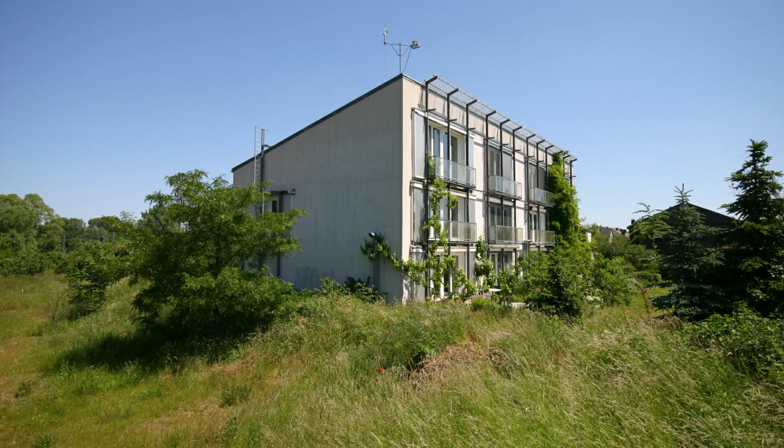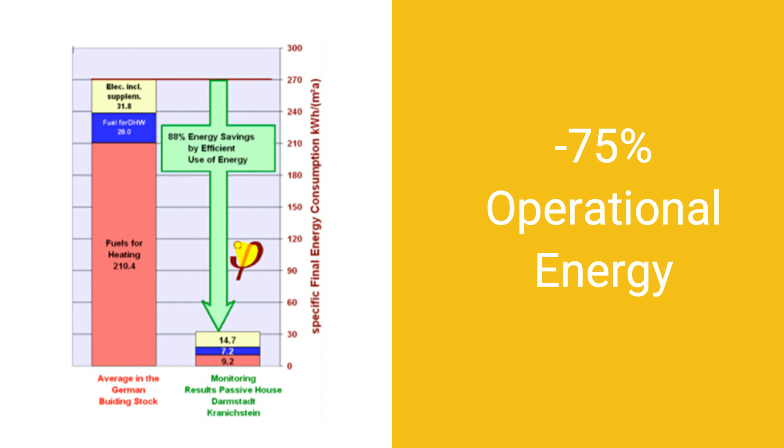The Passive House standard was created in the early 90s based on scientific research that concluded comfort drives performance. In the process of dramatically improving comfort, application of the Passive House principles also resulted in up to 90% reduction in the energy required for heating and cooling, and up to 75% reduction in the total operational energy use of buildings.

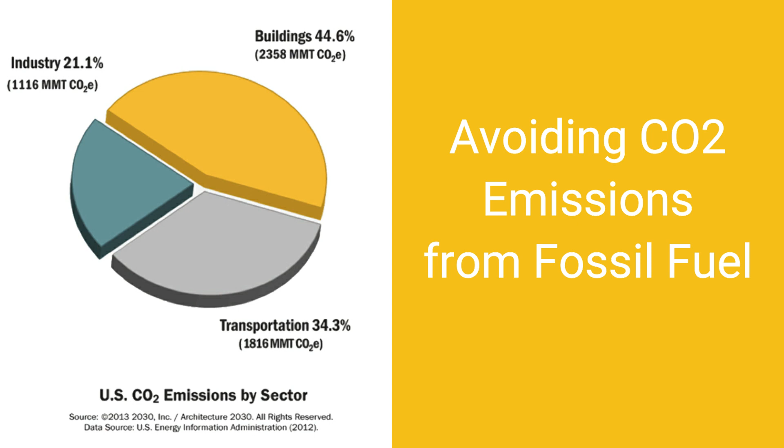Historically, almost all of that energy was derived from the burning of fossil fuels and has been a major contributor to CO2 emissions. In an effort to drive down those emissions, an increasing number of countries, regions, and cities are adopting the Passive House construction standard in order to support their transition to a fossil fuel-free energy grid and reach carbon neutrality. Those places include the province of Brussels, British Columbia in Canada, the entire country of Luxembourg, the cities of New York, Dublin, and many others.

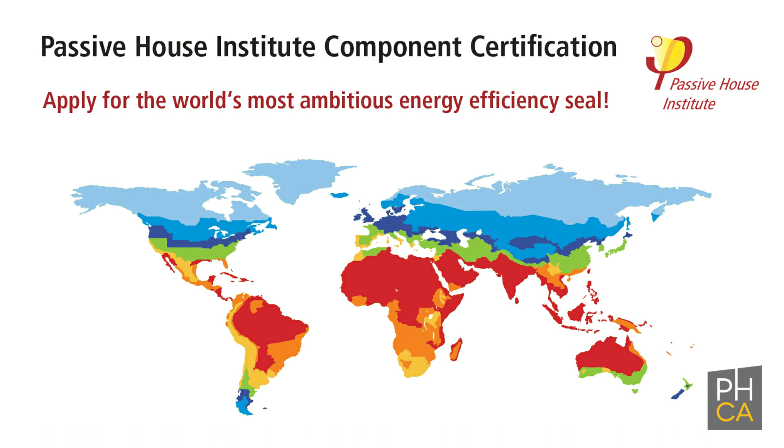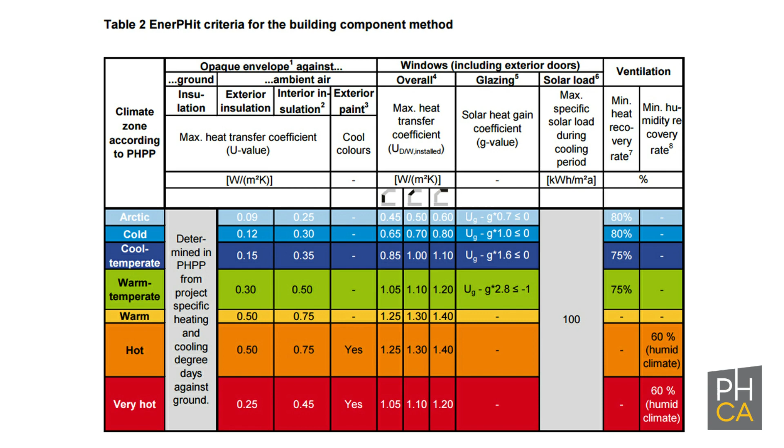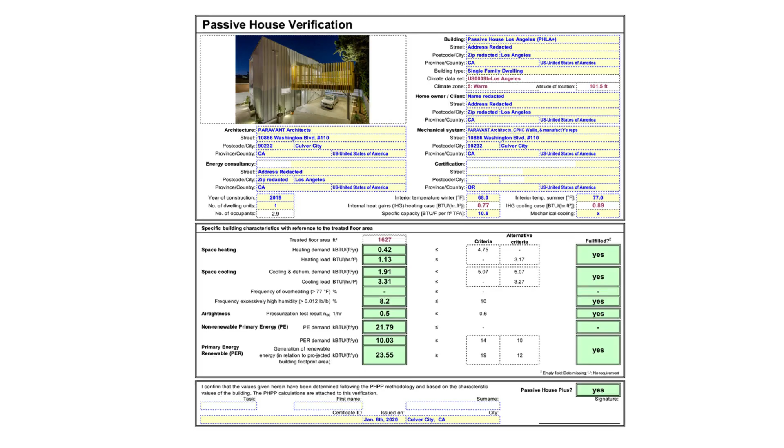It is important to point out that Passive House is climate specific, since even if the standard is setting worldwide energy targets for heating, cooling, and the total energy consumptions, the ways to achieve those targets differ dramatically based on the local climate. A simple but comprehensive energy modeling tool, called the Passive House Planning Package, or PHPP, allows design teams to identify and select appropriate solutions for their project based on location, building design, and performance goals.

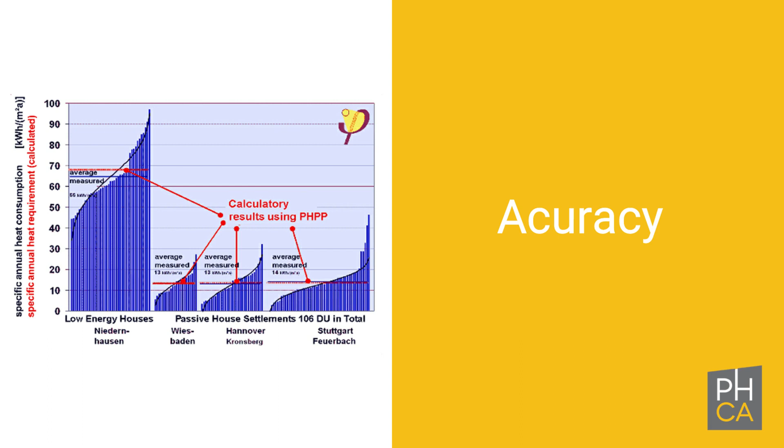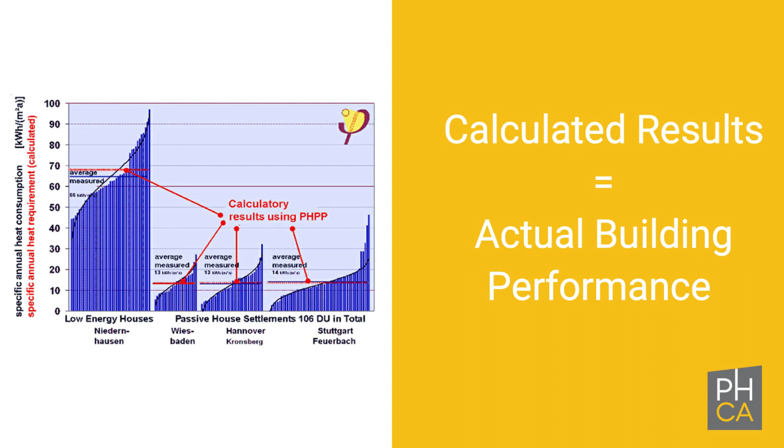Another important reason why jurisdictions are embracing Passive House around the world is the proven accuracy and the high correlation between the expected performance and the actual performance once the Passive House buildings are completed. The PHPP delivers reliable performance with no performance gap.

The 5 basic and inseparable key principles of Passive House are an airtight building envelope, strategic insulation correctly applied, analysis and management of thermal bridges, high-performing windows and doors, and continuous balanced ventilation.

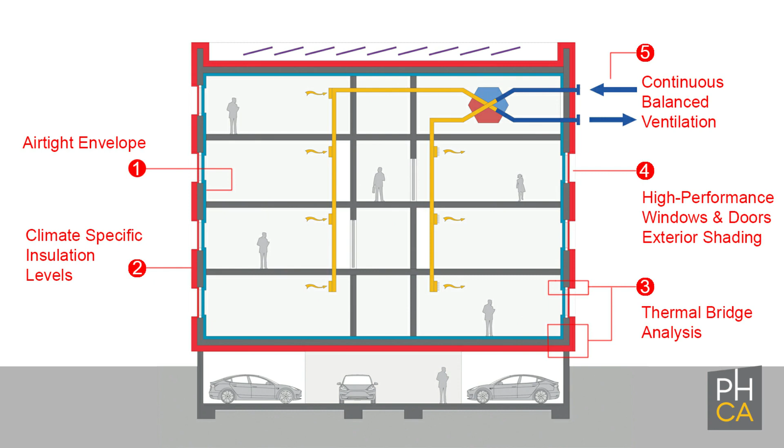What does all this mean for us here in California with our mostly mild climates? California was the first state to implement minimum energy requirements in 1978, and California's construction code remains today one of the most advanced codes in the country.

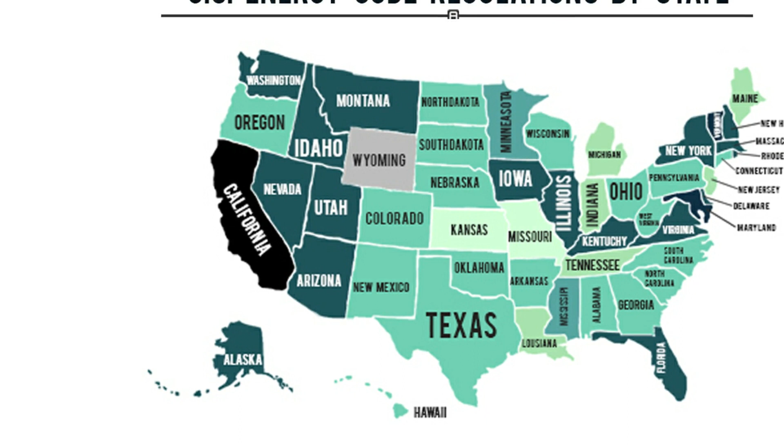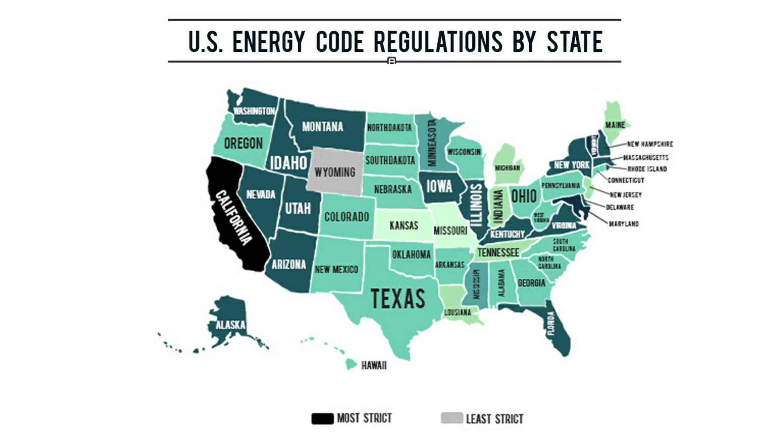Unfortunately, due to several ambiguities and loopholes, our construction code is not built to identify a defined end performance goal or move fast enough to avoid compromising our future and the future of the planet. Building codes are intended to set a bare minimum level of safety and performance. They work to prevent catastrophic failure at the bottom, not to define optimized outcomes.

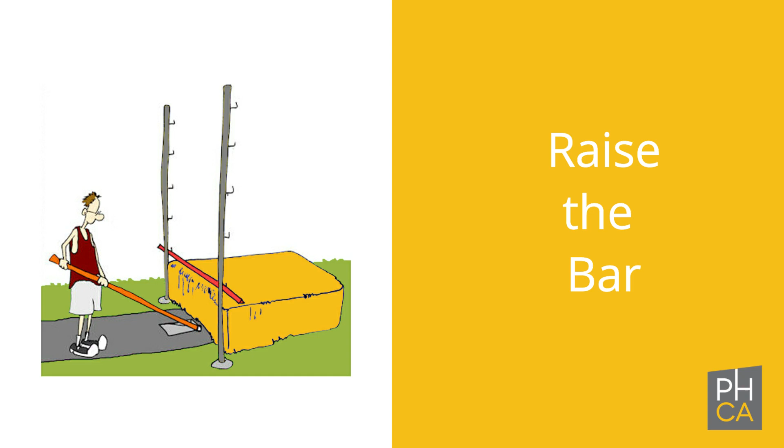The PHCA community already knows it's possible to build much more comfortable, healthier, and better performing buildings with little to no impact on the investment required, especially here in California.

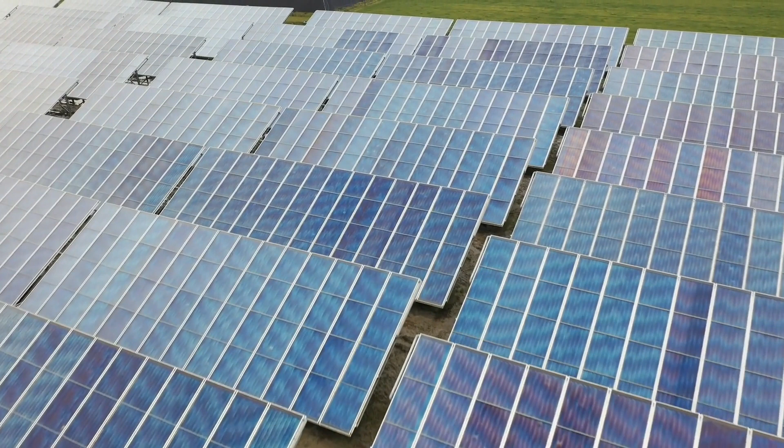A positive factor in California is our transition initiated away from natural gas to all electric. This decarbonization shift aligns perfectly with Passive House because the first step in decarbonization is to maximize efficiency. The Passive House Standard's Primary Energy Renewable (PER) framework goes one step further to optimize building designs to support a 100% renewable energy grid.

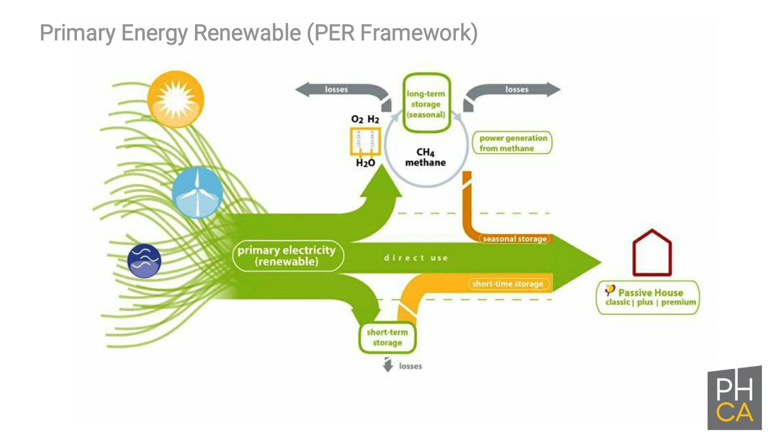Let's review the 5 key principles of Passive House and look at how they work together to provide a unified, integrated systems approach to the designing of buildings. The first 4 of the principles have to do with the building envelope, that is, the boundary between the inside and the outside. Passive House Principle Number 1, Airtight Building Envelope.

The most dramatic difference between a Passive House building and a standard Title 24 code construction is the airtightness of the building envelope. Because California does not require air tightness testing, the most significant loss of heat in winter or cooling in summer takes place through small gaps in your floors, walls, and roof.

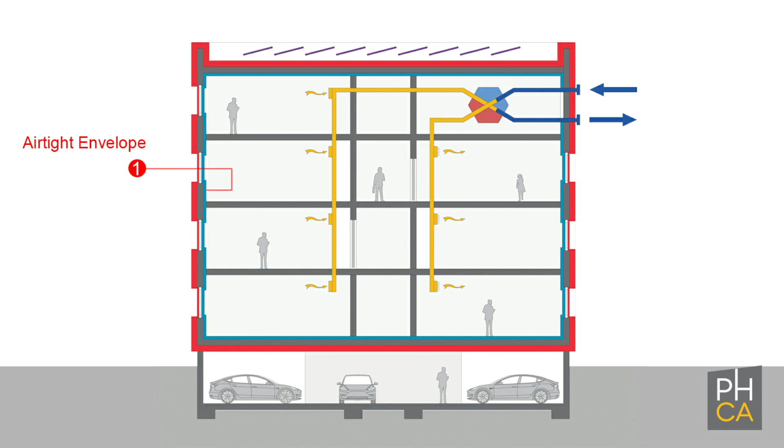By applying the Passive House air tightness requirement, a 20% improvement in energy saving would be made in local construction. To illustrate the potential gains, for a 2,000 square foot, 2-story house, the equivalent hole from the blower door test result is about a 5-inch diameter. Today, most California's new construction of the same size have the equivalent of a 16-inch diameter hole.

How do you expect to keep a place cool or warm and comfortable with a window open 24/7? Passive House principle number 2, strategic insulation correctly installed. Strategic insulation means a systematic plan for insulation throughout a building that is correctly installed.

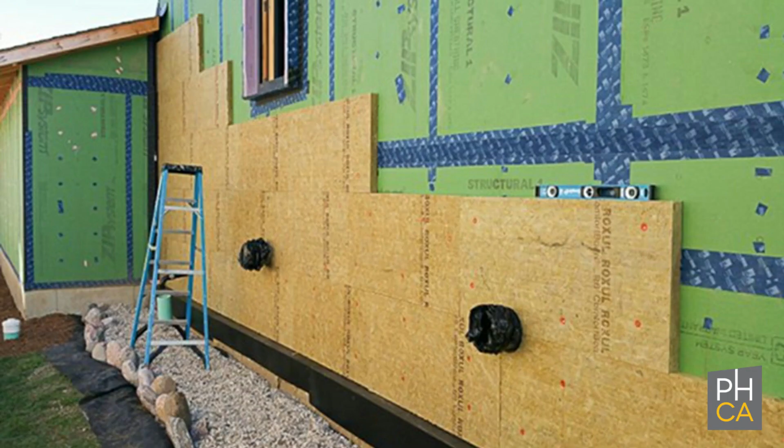In the mountains of California, we have cold winters and experience very hot days during summer in the valleys. But throughout most of the state, we enjoy a relatively temperate climate. Using the PHPP enables us to specify appropriate insulation for under the floor, within the walls, in the attic and/or roof, and often a slim layer of 1-inch or 2-inch—not 16-inch like in Minnesota—of continuous insulation on the exterior of the walls.

This system of strategic insulation is a critical factor in achieving the drastic reduction in energy required for heating and cooling for a Passive House building.

Passive House principle number 3: avoid or minimize thermal bridging. A thermal bridge is simply a break in the insulation, like a beam going from inside to outside a building, or the connections between the floors and the walls. That break allows heat to escape during winter or get into the building during summer. While intuitively this may seem insignificant, the energy losses can be substantial.

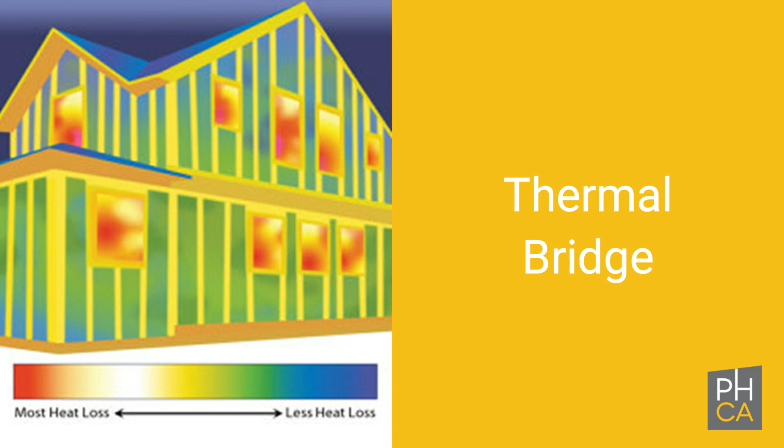These thermal bridges drastically increase the risk of condensation, mold, and potential damage to the building structure. Therefore, they need to be avoided or minimized as much as possible. Studs, beams, or concrete slabs that create breaks in the continuous insulation are the most common thermal bridges. It is important to avoid them using specific design details and thermal break products and materials. Paying attention to design details and installing a layer of continuous insulation on the exterior walls are the most common practices to avoid thermal bridges.

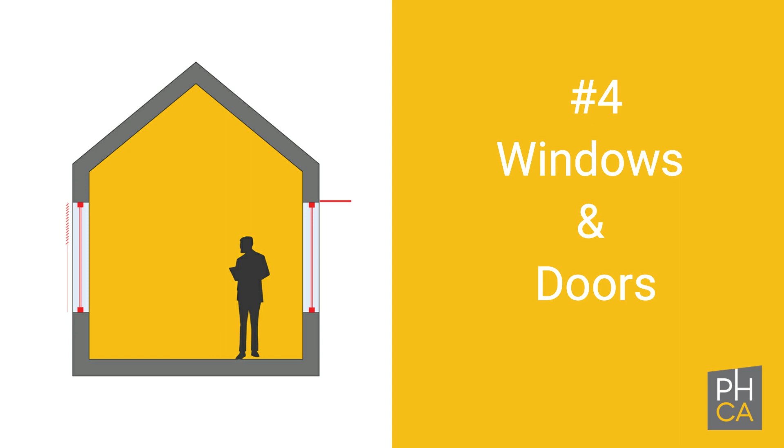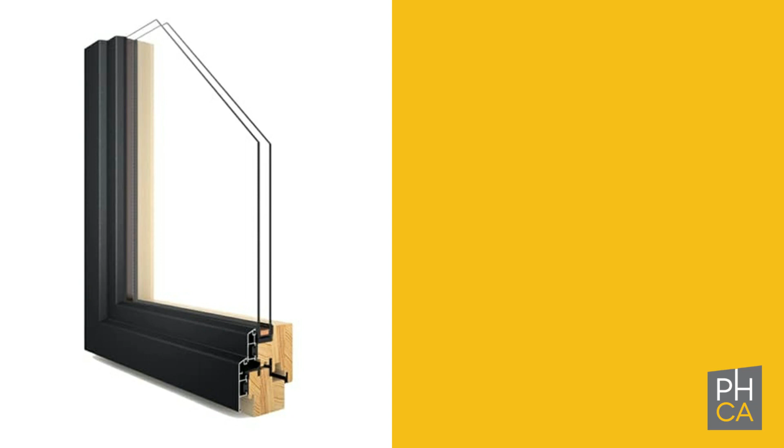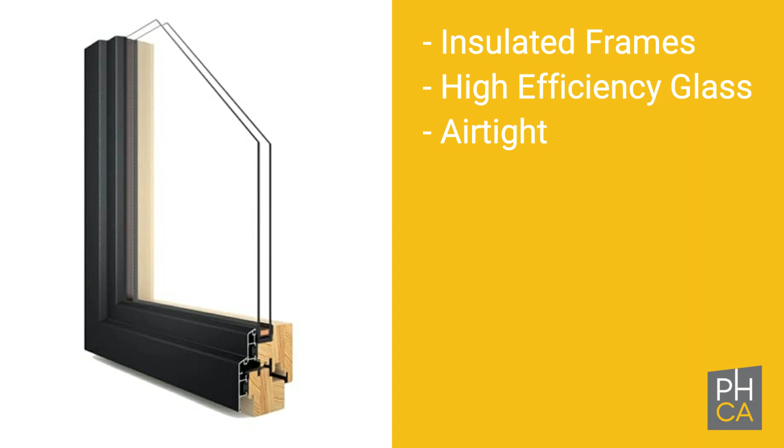Passive House principle number 4: high-performing windows and doors. Windows and doors are the weakest points of the building envelope, so it's important they too are high-performing. While triple-pane windows are required in many locations to meet Passive House energy targets, in most California locations double-pane windows will work perfectly—but energy-efficient ones, meaning better thermally insulated frames, high-efficiency glass, and airtight installation.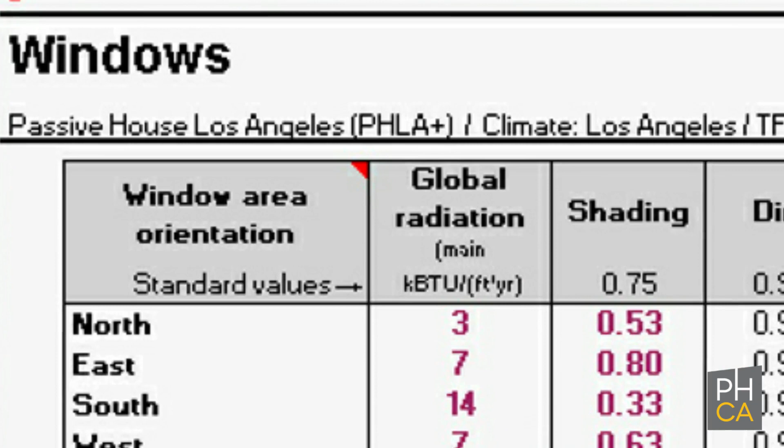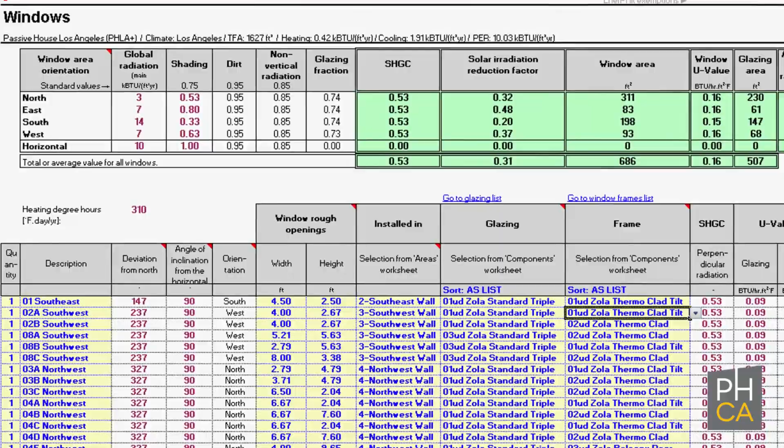A house, or any building, is a system, and windows and doors are part of that system. The detailed modeling of PHPP enables specification of windows and doors appropriate for the overall performance goals of Passive House, including how they are installed. Windows can help heat your place in winter, but they can also make it overheat in summer. Therefore, placing and choosing your windows is crucial, and shading is a key aspect of the design strategy.

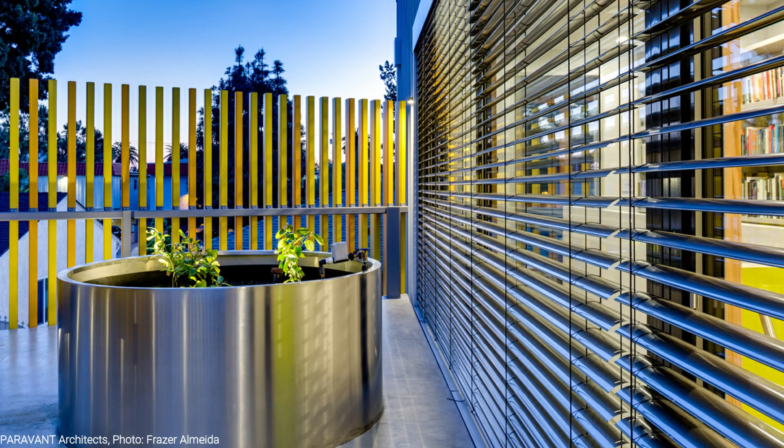Shading by trees, fixed architectural elements, external blinds—but always external shading. Internal shading is far from being as effective; the heat is already in the building, it's too late. Now you can sit by the windows during winter or summer without being uncomfortable. We've just made your place bigger without increasing the square feet.

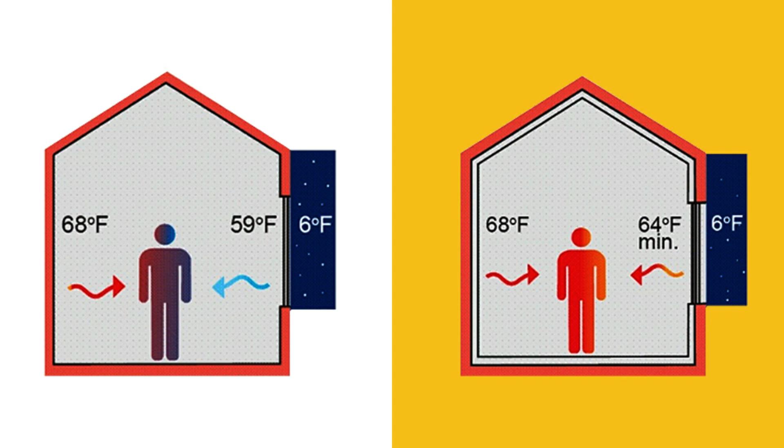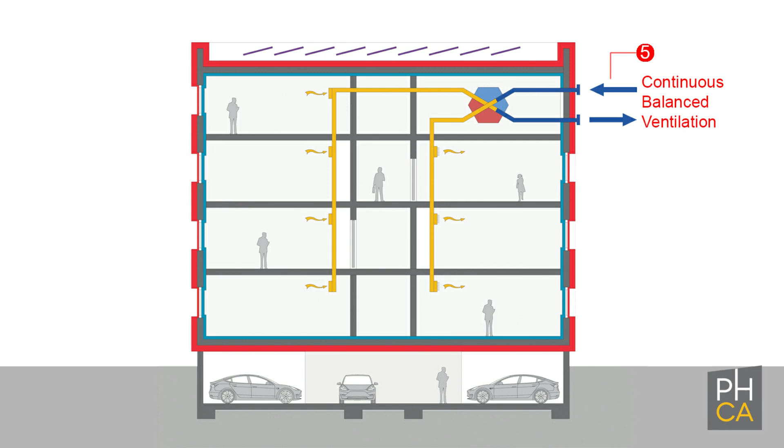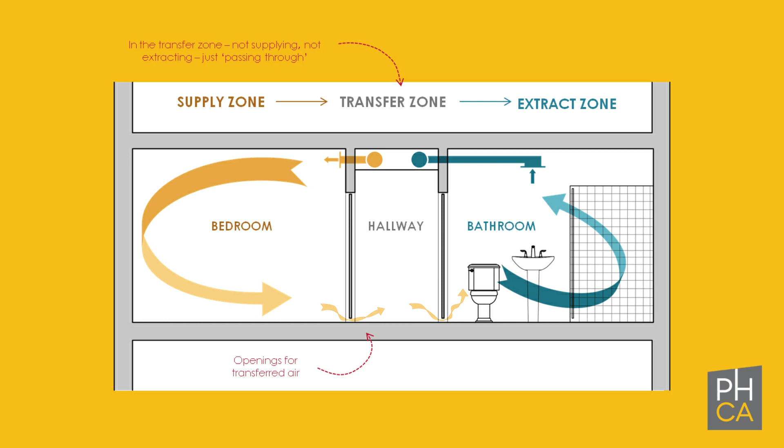Passive House principle number 5: continuous ventilation, generally with heat recovery. Houses don't need to breathe, but the occupants do. In order to provide continuous filtered fresh air, a passive house requires balanced mechanical ventilation. A steady flow of fresh, filtered air is supplied to the living spaces 24/7, and at the same time an equal flow of air is extracted from the home, generally from kitchens, bathrooms, and the laundry room.

This continuous exchange of stale air for filtered fresh air is critical in pandemic times and with the recurrence of wildfire smoke in California. Healthy indoor air quality is another important benefit of passive house standards. This balanced exchange of air is accomplished most of the time with a heat recovery ventilator, HRV, that transfers the heat from the outbound conditioned air, transferring up to 90% of that heat to the incoming air.

In summer, the HRV works the opposite way—the fresh air coming in is cooled by the exhaust air going out. Also important, the HRV accomplishes the transfer of heat without mixing the outbound and incoming air.

As you can see, passive house is not rocket science. It is mostly just changing priorities based on common sense. Passive House California has been advocating for the passive house standard since 2007. A 2016 study demonstrated the gains for a single-family passive house compared to standard construction. Depending on the California climate zone, heating and cooling energy savings would range from 40% to more than 80%. That is huge savings.

A 2019 study based on a California Energy Commission multifamily prototype and validated by the California Energy Codes and Standards team went further, demonstrating the benefit of the Passive House standard over the Title 24 code. At the Net Zero Conference 2018, an icebox challenge between a Passive House box and a Title 24 box dramatically illustrated the superior performance of Passive House.